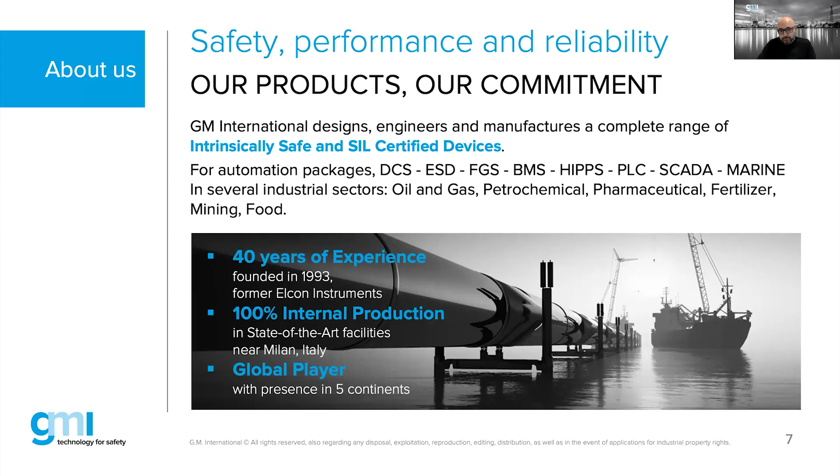As I mentioned before, we are a safety company and we aim to provide safety and reduce the risk of hazardous events, and to safeguard people, assets, infrastructure, production process, and the environment too. So for this reason, the quality aspect of our product cannot be overlooked. We design our products, we manufacture and test them 100% internally, meaning that we do not outsource any of these tasks. This is why we are confident about the quality of our product.

A couple more slides before we get to the webinar. One is about the certificates, it's the next one I suppose. Yeah, this is the product range, but we can go to the product range in a moment. About the certificates, we have... sorry, I was too quick.

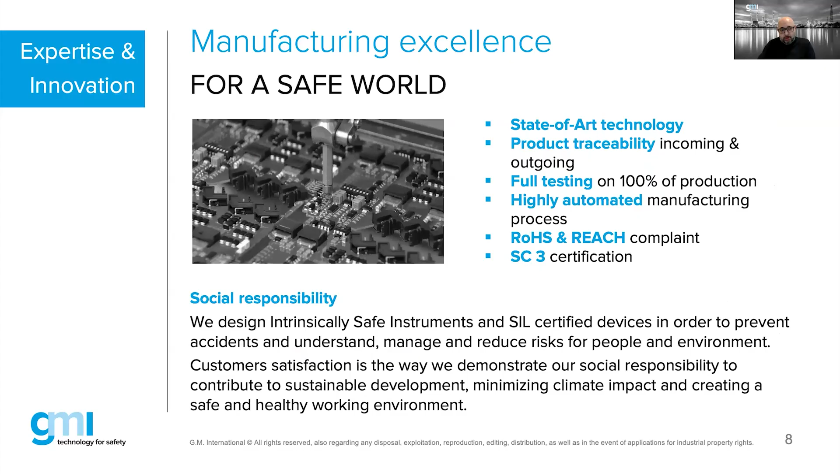About the certificate, or at least the certification bodies that we're dealing with - this guarantees the quality of our devices, but also guarantees that GMI products comply with market requirements according to different local regulations. Now we can go to our portfolio, a quick overview.

Just a minute. So as I was mentioning, we have IS barriers, so intrinsically safe barriers, safety relays, SIL certified with and without line monitoring for both energized-to-safe or de-energized-to-safe applications. We have isolators, we have AC power supplies up to SIL 3, temperature and digital multiplexers for Zone 1 installation. We have custom termination boards for easy connection to main PLC and DCS systems, HART multiplexers, surge arrestors, and the new X1 series.

The new X1 series is the newest line of products, a series of termination boards including IS barriers, isolators, safety relays, gateways, and HART multiplexers too. The final slide is a list with some of our customers - we stretch from system vendors to EPC and OEM and so on.

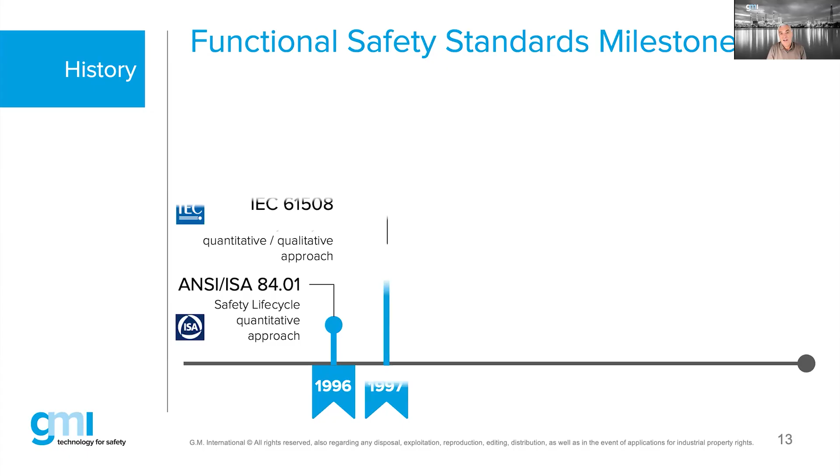Rightly followed in 1997, we had the first edition of the IEC 61508. The IEC 61508 is the life cycle mainly for manufacturers of electrical components, electrical signals inside their subsystems, and/or for programmable electronic safety related systems, which we'll abbreviate as E/E/PES.

So the IEC 61508 came out in '97, and the backbone of this functional safety standard was the safety life cycle. It's based on that life cycle that we have today our 61511 life cycle, which is a similar approach and framework that I'd like to talk to you about.

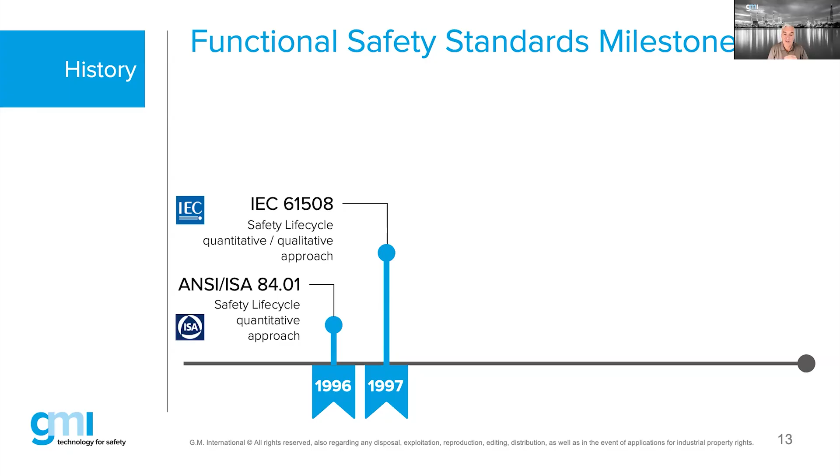In 2004, we had the first edition of the process industry dedicated functional safety standard. This functional safety standard is a kind of good engineering practice on how engineers need to define, integrate, operate, and maintain safety instrumented systems.

So the product range that Gabriele just showed you for GM International fits totally into the picture of the safety instrumentation function loops. When you're building a safety loop, we call that a safety instrumented function. All of that is described in chapter 11, the design and engineering of your safety instrumented system.

You see here a small note, an asterisk between brackets. ISA, which had previously released the 84.01 in 1996, adopted the IEC 61511 in 2004 with one single change. They added an additional clause, at that time called the grandfather clause, and the reference for that is shown here.

Moving on to 2010 — I take you back to April 2010, when the total release came out of edition 2, the revised edition of that manufacturer-dedicated functional safety standard for E/E/PES.

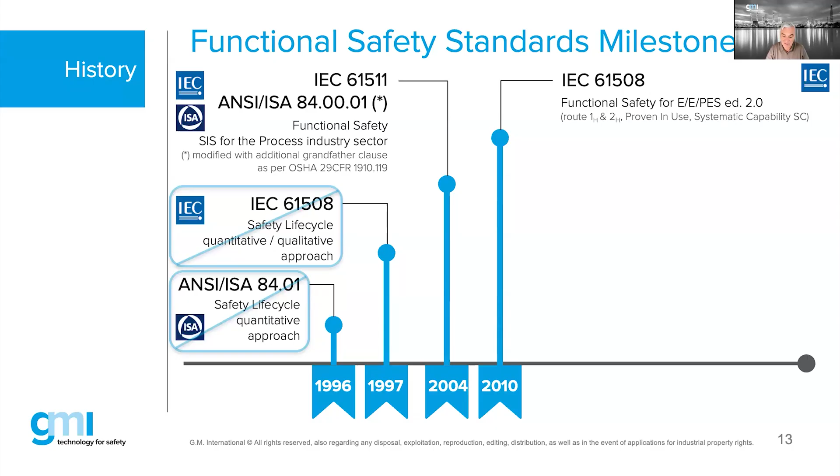In 2016 and 2017, we have two different dates here. Edition 2 was released by the IEC, the International Electrotechnical Commission. So the 61511 has been revised — it was released as edition 1 in 2004, but after 12 to 13 years there was a new edition out, and the new edition is the current edition for today.

When the edition came out initially in 2016, there was a problem because they released an older draft that wasn't supposed to be released. That's why in September 2016 they came up with a corrigendum, and finally there was an amendment out in 2017. What can you take away from this? If you're using the 61511, make sure you're using the 2017 edition and not the 2016, which could potentially be a wrong release.

There we are covering things like route 2H, which is called the prior use, where previously the 61508, the route 2H for the manufacturers, that is called proven in use. And they are both based on quality feedback data from the field that both parties will have to prove. Here, the preference of the 61511 edition 2 today does not want to use necessarily a safe failure fraction, and there are particular reasons for that.

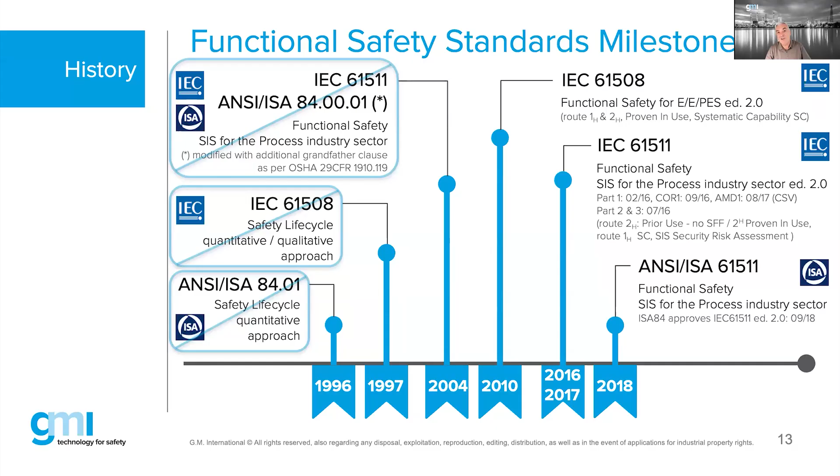But if someone from the US or working on projects for the US would have experience with, they have adopted the ISA 84.00.01, that used to be called 84.00.01, now called the ISA 61511, and they adopted the current edition 2 one-to-one in the year 2018. Of course, they wrote technical report 4 in 2020, which was the application on top of the 61511, but that's a technical report which is not shown here on this slide.

Taking you a little bit into details of the standard itself, there are 3 sections. We call them section 1, section 2, and section 3. And only section 1 is a normative section. Section 2 and 3 we call an informative section. In theory, the informative section here in part 2 should be able to explain you with, let's say, explanation enabled to take away your subjectivity, enabled to make the interpretation from the normative requirements with some guidance text in part 2. That is the theory.

Unfortunately, it's not always so easy as it sounds, because often in part number 1, the normative section, they will command you, you shall do something. Whereas in part 2, the informative section will not necessarily help you explain how you can achieve whatever the requirement was asking you to achieve.

So edition today, edition 2, is the consolidated version 2017, which will actually include the complete framework. And one of the frameworks that we will explain today will be that life cycle. It will also define different systems on how you can configure them with system architectures, with hardware fault tolerance, etc. It will have dedicated requirements for hardware as well as for software.

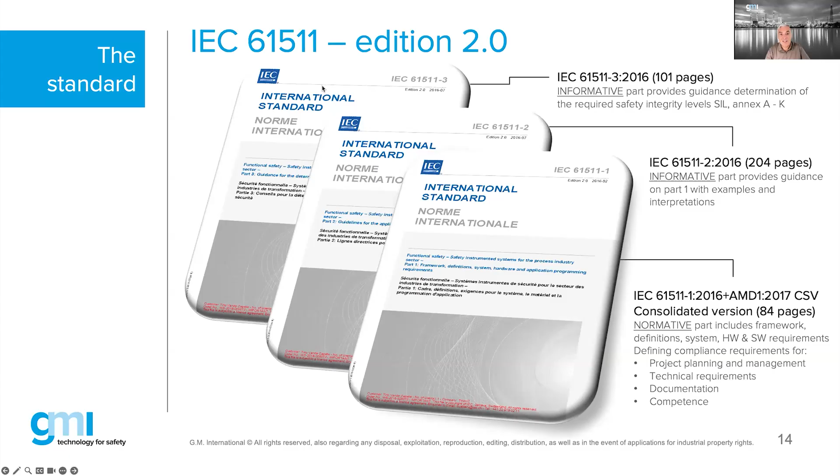Now, it will not give you guidance in part three, as an example, on how to run a HAZOP or how to do a LOPA. They may refer to it, but let's say part three, there's some room for improvement on that informative section, part number three.

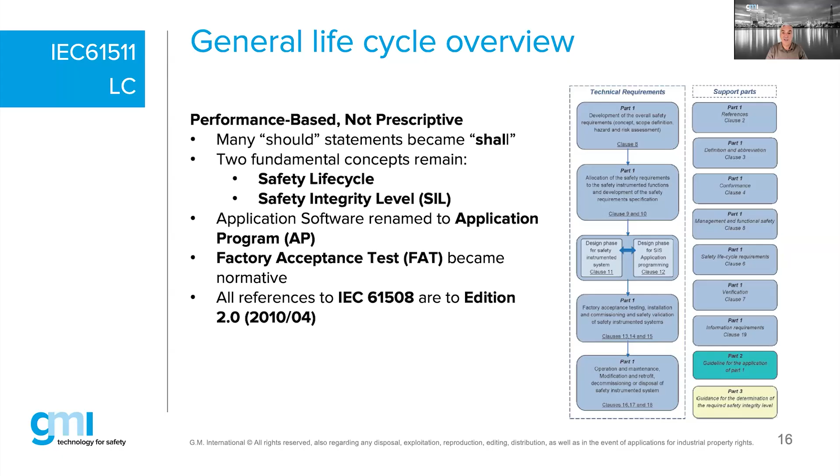There are two fundamental concepts which remain the same comparing it with edition 1. So if anyone listening into this webinar had some experience with edition 1, it's the same approach that we will do in edition number 2. The life cycle is a fundamental approach on how we have to handle all those activities in a systematic way, in the hope that when we can force our engineers to follow that systematic working principle, they will follow step per step, they will document step per step, they will verify step per step.

That's basically the idea behind such a life cycle - forcing engineers to do something in a systematic approach and giving them some guidance will hopefully lead to engineers having less room for making mistakes.

It's a probabilistic performance-based design, therefore the standard is called performance-based, since we are using failure rates to express our availability or unavailability on our safety loops. In safety business, we're always caring about those dangerous failures, which is opposite to production and process people. Those typically focus on maintaining production, whereas safety engineers typically focus on whether we can still achieve safety despite having one or more internal dangerous failures in our safety loops.

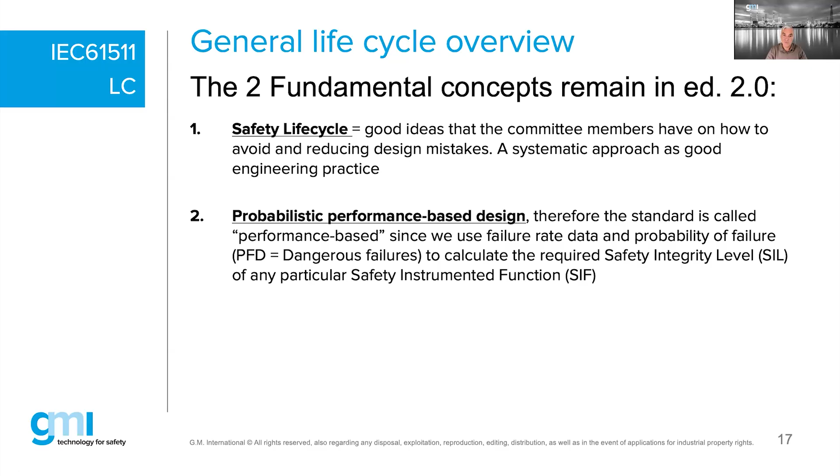Let's see the picture of the life cycle, which the majority of you hopefully have seen already. The life cycle itself starts from the very first task in any project, which is always to identify your hazards. Once we start to understand our hazards, we need to analyze the hazard to understand what are the potential consequences and what are the potential frequencies that this hazard can occur.

Once we understand the consequences, the frequencies are always very difficult to judge - how frequent something will happen if it potentially never happened before. So how do we judge this? There are also items we could highlight, mainly covered in a training course. We are skipping that mainly in a webinar, but briefly, the estimate of frequency is the first challenge in most projects.

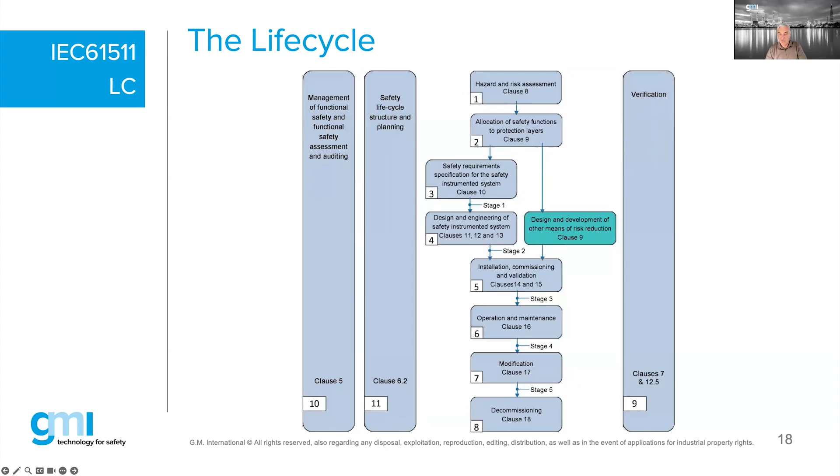All of this must be managed, assessed, audited, nicely planned, documented and structured. And of course every phase, before we continue, needs to be verified. That is the life cycle explained in a record tempo of 10 minutes, on how you have to handle your projects.

Summary: it deals with activities and responsibilities in a systematic way. It needs to identify the competencies required per phase—who can do what, and because of their competence, they are the engineers identified to handle those activities. There need to be documented requirements so we know what we're trying to achieve. It also addresses the life cycle: functional safety management, verification, validation, functional safety assessment, and audits. The last point concerns quality—how we can prove, check and maintain the quality of those activities for which we are responsible and accountable.

And clearly, we will have a different life cycle for an end user versus a system integrator versus an engineering contractor.

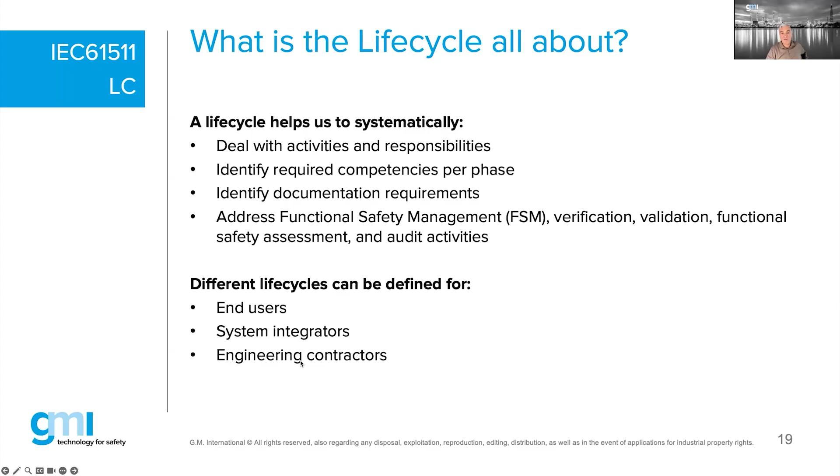I made it fixed, you have it in the meantime? So, all right good, I think you can see it now.

In addition to lifecycle activities, requirements are changing per SIL level - that's the first answer you could think of. B: it is irrelevant of the SIL level, which means it is neutral, the lifecycle is applicable for every SIL. C: it is not applicable for SISs built before 2016. D: none of the above. So what is your gut feeling - A, B, C, or D?

Same as during our exams on the competency review for TÜV Rheinland, only one answer is the most complete and most correct. So if you believe that none of A, B, C is correct, then you have to select D, or you can select either individual A or B or C.

Okay, we have 65% of our participants clicked. In the meantime, 74, 73 - so we're nearly there, we need 2 more clicks. So whoever has not clicked, give us one of your guesses. You cannot lose any face or money or your job, because we will not tell your boss if you clicked the wrong one, because we are very polite here.

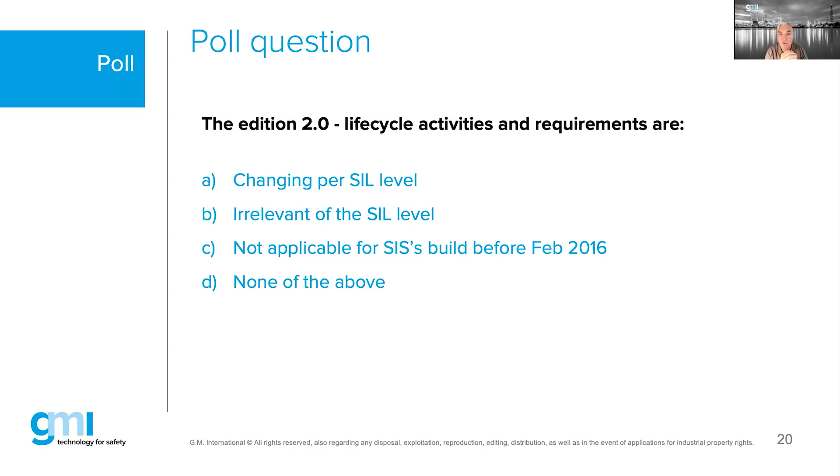So the only correct answer would have been B: it is irrelevant of the SIL level. Even for the older systems, we still have to investigate and still have to do our gap analysis.

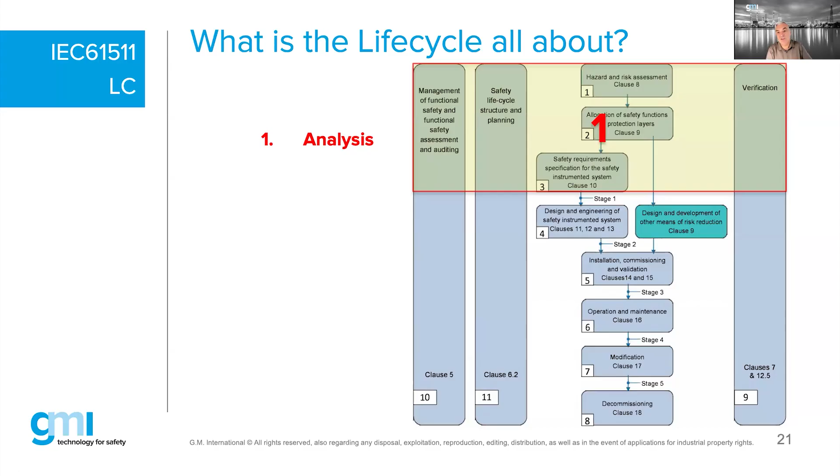In summary, we have the analysis phases - phase 1, 2, and 3, which we call the start of any project. Then we have the realization phases, where we design and engineer our system, install, commission, and prove again with validation that the systems are ready, the people are ready, the procedures are ready, etc. Then finally we have operation and maintenance, which is typically the longest duration of any project.

You can imagine any engineer involved in design and engineering themselves - maybe months, not typically years. But when you go to operation and maintenance, some current existing customers are running those facilities for 50, 60, 70 years. I've even been on a plant that was more than 100 years old - it even survived the world wars and was still there. That means those types of plants exist for many, many years.

That means certainly here we have a very long period and rotation of people. We have people going into retirement, people quitting the job, and shift changes.

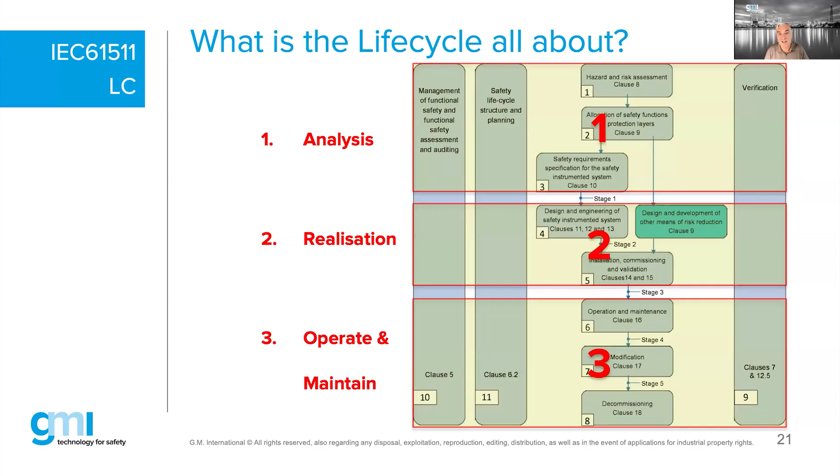So how do we maintain all that culture going with all those different people? Whereas here, if you're doing a HAZOP and you are involved in a HAZOP team, hopefully you will not rotate your people every single meeting. You will have the same consistency of people during that.

So that is the challenge that we see here already in that life cycle period. And of course, everything must be managed, assessed, audited, documented, planned, and also needs to be verified. That's the overall definition that we show you here in bullet number 4.

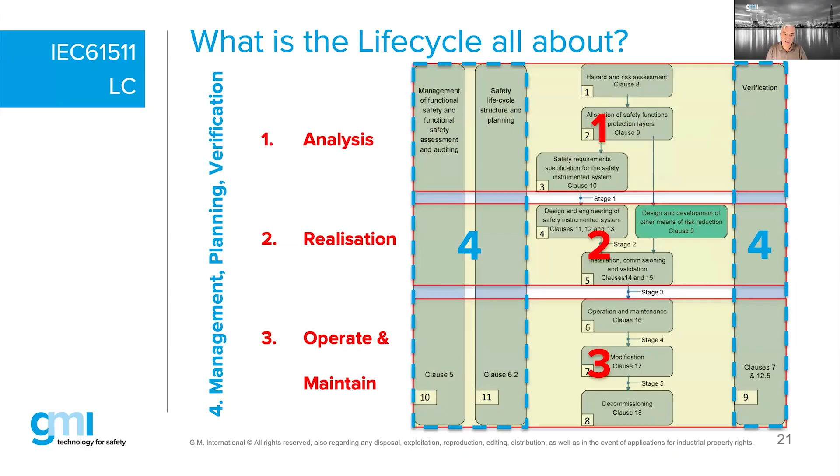I'm going to give you a wrap up on all those phases because I still want to handle your registered questions during your registration. So, what is here the first 3 phases on the analysis, which is phase 1, 2, and 3? It always starts that we are requiring that people will identify the process hazards.

And also you are required, mandatory as a functional safety management requirement, you are mandatorily obliged to define your risk that goes along with your hazard.

For instance, you cannot do like they have done in the old days with the incident in the industry called Bhopal in India. It was based on a US end user that did a cut, copy, paste from an existing facility in the US and planned it into India without doing a new risk analysis, because there they had a completely different risk criteria around that facility. Well, that is certainly not something we would like to repeat in the future.

That means that since edition 1 came out in 2004, it's mandatory required to prove that you have done a hazard identification practice, a hazard analysis, and also a risk analysis.

What is new by edition 2? Well, new - it's already 9 years old today, so it's still called new, but it is based on the latest edition - you shall carry out a security risk assessment on your industrial automation control system, which we call the IACS.

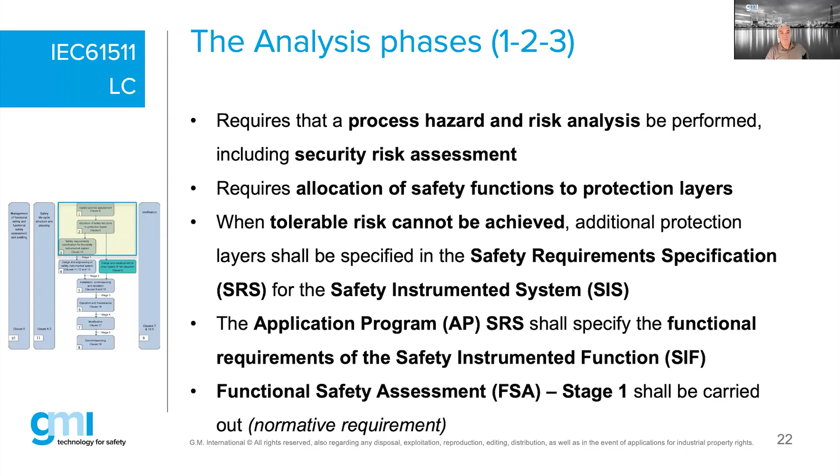The next step was your realization phase, which is 4 and 5. Here we're going to go into our design and engineering, which is the majority of text input in your normative section, part 1 of the 61511.

And if you go into chapter or clause 11, it's called design and engineering of your safety instrumented system. And of course, there is a lot of technical detail in there that you need to understand and be able to build the correct architecture for the dedicated SIL that you try to achieve.

So you will be driven into a certain system architecture, which will be based on either route 1H or route 2H. And route 2H can be here, in this case, either prior use for the 61511 for the end users, or proven in use for the manufacturer, which is the route 2H coming from the 61508. It will specify techniques and quantitative targets for your SIL levels.

You need to go through your factory acceptance test in order to prove that you are checking and testing the functionality of whatever system you have been building, based on your safety requirement specification. And that needs to be followed here in that yellowish block in the middle. You see there a small stage 2.

Stage 2 is again a normative requirement from the IEC 61511 standard that needs to be carried out by the senior independent competent person. They need to make an expert judgment, and that expert judgment is not related to any work activities involved in phase 1, 2, 3, or 4, because you need to be independent from the design and development of other means of risk reduction, that is what this greenish block is showing you.

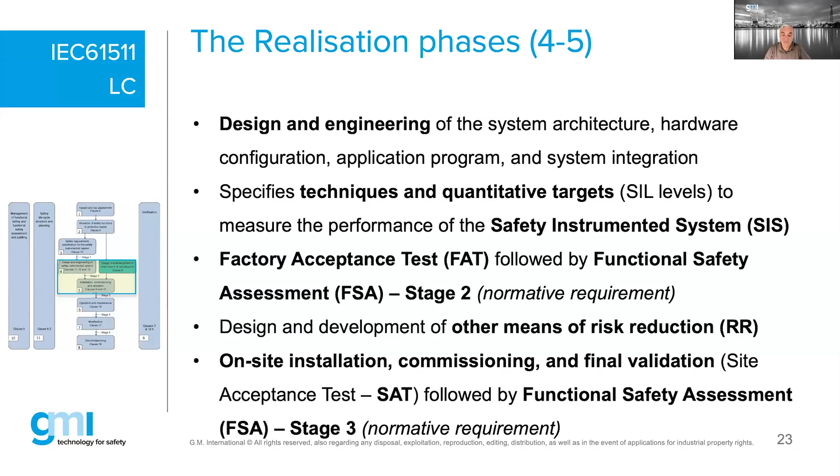And finally, we go to the operation and maintenance phases 6, 7, and 8, which again, that's probably 10, 20, 30, up to maybe 100 years or even more. So it's for a very long period. You try to operate and you try to maintain your systems safely.

The focus of IEC 61511 edition 2 is mainly based on forcing, or advising, the end users to collect field data from their own installation, with their own experience, with their own proof test evidence that they have done, not from a database coming from a collection of data from other fields, other vendors, other generic data. That is not the intention of IEC 61511.

So basically, it's quality field data that we need to try to collect through operation and mechanical integrity programs, enabling us to prove the performance of our safety instrumented systems, if I would be here now as the end user talking. It also requires that you prove your proof test effectiveness and consistency throughout your maintenance phases. In other words, if you have all this rotation of people, all these different people coming in with the same job profile, how can you prove how consistently those different engineers are carrying out the same proof test on your safety systems?

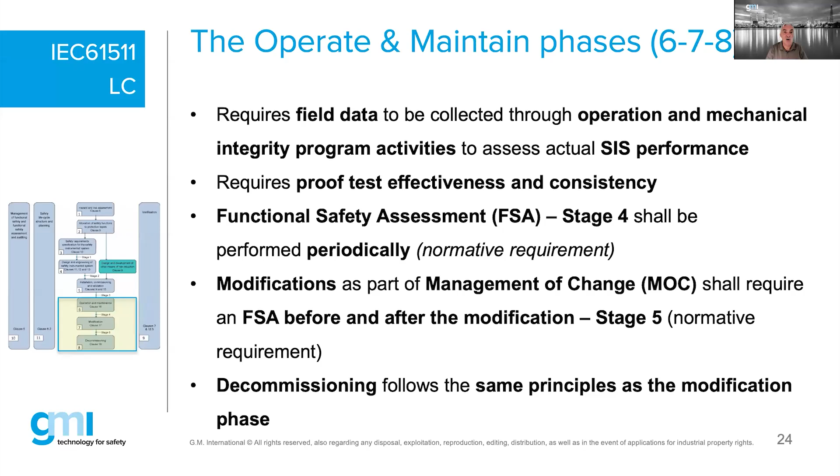Summary: the general phases 9, 10, and 11 are shown here on the left-hand side. 10 is known as our functional safety management requirement in the standard, whereas 11 is known as the structured planning and documentation. And here, block number 9, or phase 9, that is our verification, which is valid for every single phase in the life cycle.

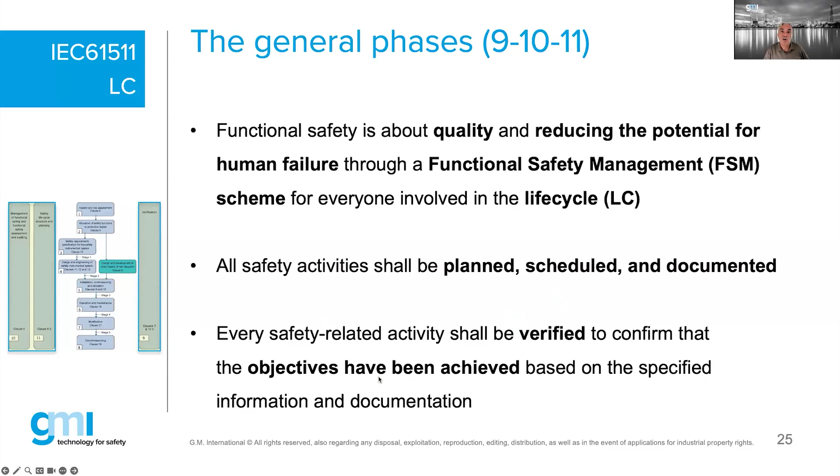So functional safety is about quality and reducing potential human failures carrying out activities in that life cycle. All the safety activities need to be planned. So we need to exactly plan when we will do all those activities in a structured way. When they are planned, they will be referenced in a document, which means the document becomes our requirements. And of course, they will be planned in terms of activity planning—when will we carry out what phase in the life cycle? Every safety related activity shall be verified before we move on to the next phase. That is basically the backbone of a life cycle, here called IEC 61511.

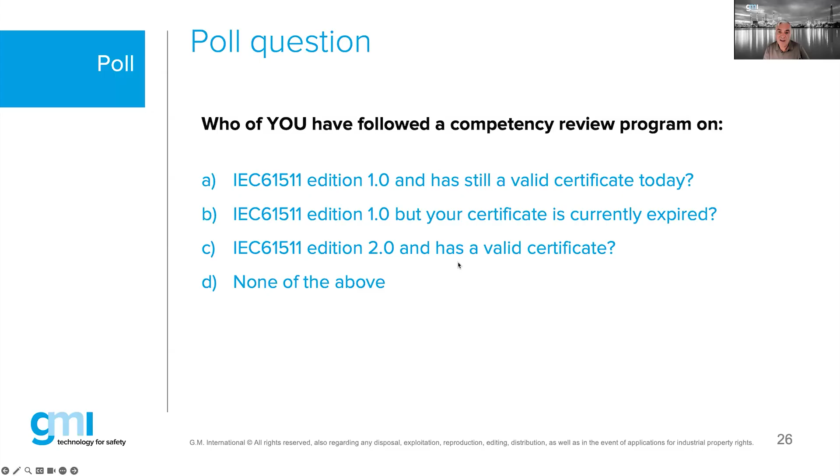So some of them have an expired certificate, and that is for us an indicator to see that you're unable to prove to the outside world, to your management, or whatever, that you still have a valid certificate, or you need to prove that with the current edition you are still competent. There are, of course, some competency review schemes available on the market.

What is my summary, my main takeaway I want to give you? It's not all about that famous SIL number and PFD, because that's often what we've seen in the past. People think they are doing safety engineering, and they're blindly focusing on that SIL number and those PFD numbers. Of course, PFD numbers are purely an estimate of availability, and that's certainly not the purpose of the 61511. The main purpose still today for me is giving guidance to engineers, enabling them to carry out the activities. And in the hope that when they follow that type of guidance, which is called good engineering practice from the 61511, they will make fewer mistakes themselves. They will learn, hopefully, from mistakes that were made before, and that lesson has been given as guidance in a text called the IEC 61511.

So the Functional Safety Lifecycle provides you a systematic approach enabling you to achieve, hopefully, safety in the process industry. And the process industry, by edition 2, the following applications are covered: oil and gas, traditionally from edition 1, also chemical and petrochemical industry like edition 1 was covering. What was new by edition 2 in 2016-17, they added the pharmaceutical business, or applications, and also food and beverage.

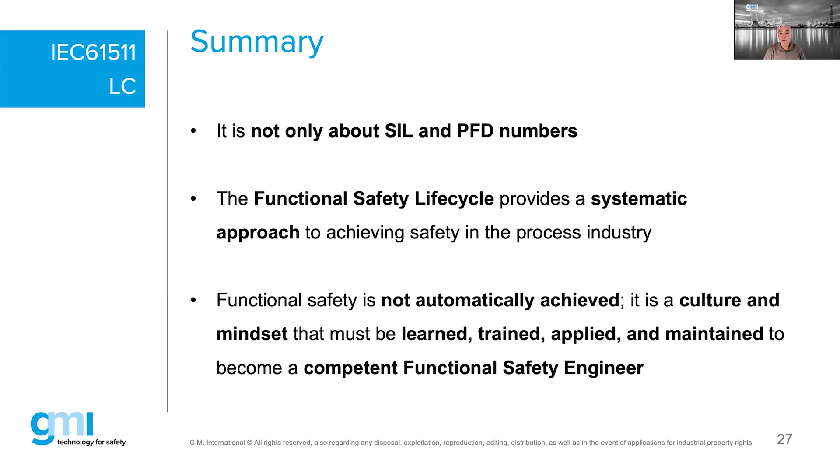Functional safety is not automatically achieved. It's not like, oh, I bought a SIL3 relay and therefore I don't have to do anything, everything is safe. That's not how it works. You're building integrity in your system, but you still have to do something. You still have to prove that things are working the way they are supposed to work. It's more a culture that sits between your two ears, so you cannot buy it. You only have to earn it by trying to practice it, by trying to understand it, by trying to perform it. So it's a mindset that needs to be learned and trained. It needs to be applied in your daily activities, and of course it will need to be maintained with evidence. You need to prove how you will maintain that, in order to become a competent functional safety engineer.

We at GMI, with a team of engineers, are helping support the life cycle for our end users or engineering teams doing those types of activities, which I will not list here. We can also additionally support you with life cycle support for IEC 62443.

One of my main tasks on the team is still providing the functional safety engineer training, and we just finished last week our last training for 2025. It's been an extremely busy year, so many training courses and so many engineers trained again this year that I ask myself if this will continue for the rest of my activity as a trainer for TUV Rheinland. We mainly train engineers on the SIS competency review program from Rheinland.

We also have two cybersecurity courses. There's a third one not shown here, which is the combined fundamental and security risk assessment. We also, of course, do customized in-house training. I have one at the beginning of next year in Eastern Europe, customized based on the client's request, tailored toward whatever experience that specific company wants to have.

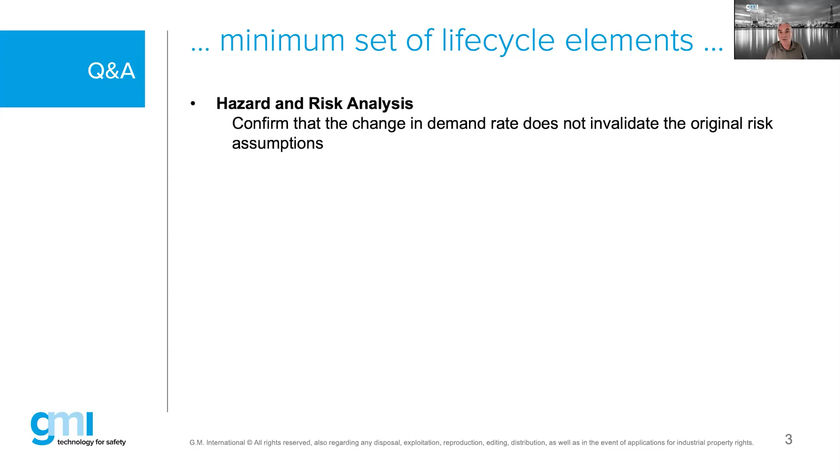Remember, in the original risk assumptions on that project, the team brainstormed and estimated a specific demand rate for that hazard, which came to a number, and based on that number someone built a safety system. If we now find the hazard demand is increasing, that means the original assumption may have been wrong. So what do we have to do? That's the first step. Second, based on the new demand rate and the required risk reduction, we may need to think about whether we have a different mode of operation.

I'll give you an example. Potentially in the initial phase of the project, the brainstorming specialist team was thinking that a demand on the hazard on the process will not happen more than once every 3 years. By evidence now, the demand rate is every 8 months, meaning the demand is happening more than once per year.

That means you're moving from a low demand mode to a high demand mode, and we want to investigate why we have more demands. Maybe we are not handling the product as the brainstorming specialist team was thinking, maybe we are handling with less caution. Maybe that's the reason why we have more frequent demands. That is one potential reason.

A second reason could be that the material you're using in that safety loop is maybe not as reliable or trustable as the brainstorming specialist team was believing when they assumed it would protect against the hazard.

We also have to look at the proof test interval assumptions, because initially there was an assumption about how frequently we would go and test that specific system. We certainly will have to re-estimate or re-verify the safety integrity level of that safety function, based on the updated demand frequency of that loop and the required proof test interval, to check if our mission time can still be achieved for that specific safety loop.

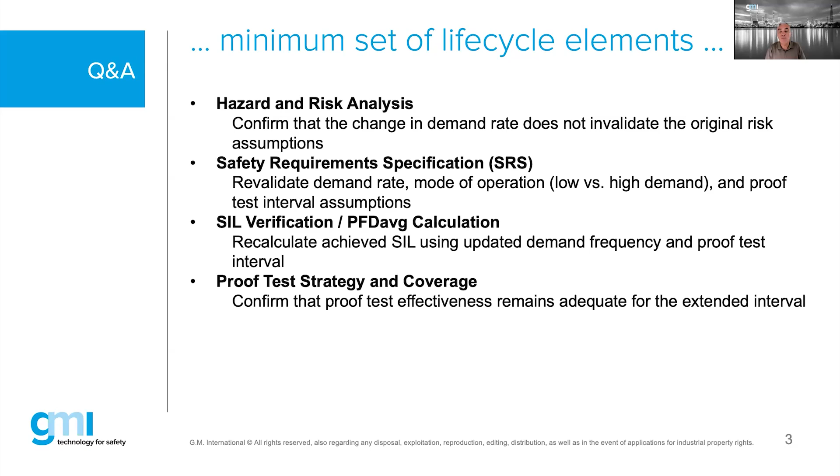The proof test strategy and coverage factor need to be confirmed again to check how effective the proof test was previously on those loops. Because maybe the proof test previously was not so effective, not good enough, and that was one of the reasons why we now have more frequent demand on that specific safety loop. It was probably not the hazard demand, it was a demand happening because of some mistake or hidden failure still present in that safety loop.

Operation and maintenance procedures need to be continually verified again to check the capability: do we have enough information for our maintenance and operators to manage and reveal those dangerous failures in their system? And of course, all of this needs to be reassessed by an expert judgment, someone not involved in the same operation and maintenance of that same SIS system.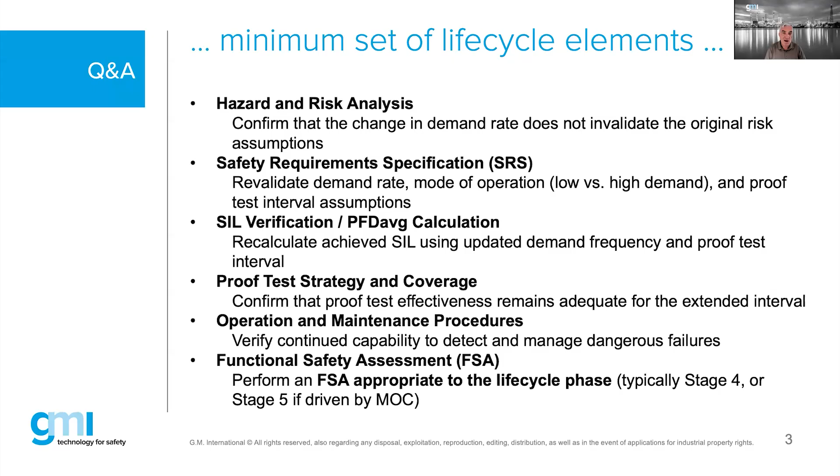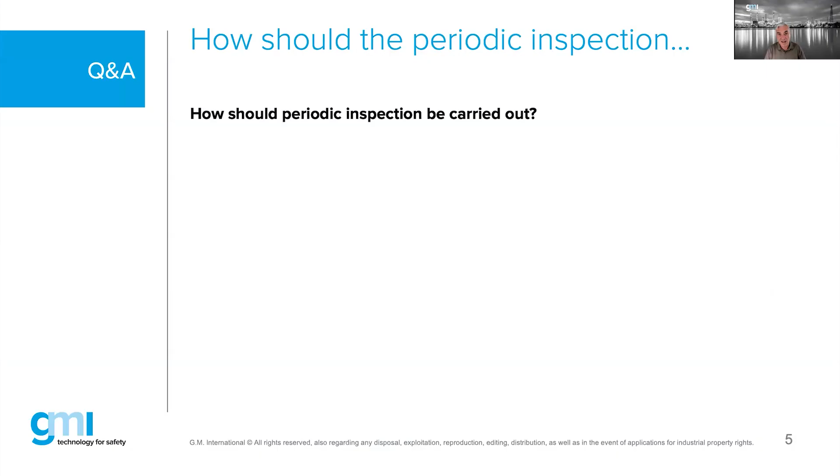Second question: how should the periodic inspection be carried out, and what are the requirements for competency of inspection personnel? That fits perfectly in the life cycle discussion. Simply speaking, follow your procedures.

Of course, if your procedures are not detailed, complete, or clear enough, the engineers will not be able to follow the right procedures to handle those periodic inspections, based on defined inspection intervals. Very clearly, if someone defines at the beginning of the project that we will test the loop every 1 year, we need to check that this 1-year interval is maintained and followed. We do not want to delay this by whatever excuse. We need to check that whatever was predefined as an inspection proof test interval has actually been followed.

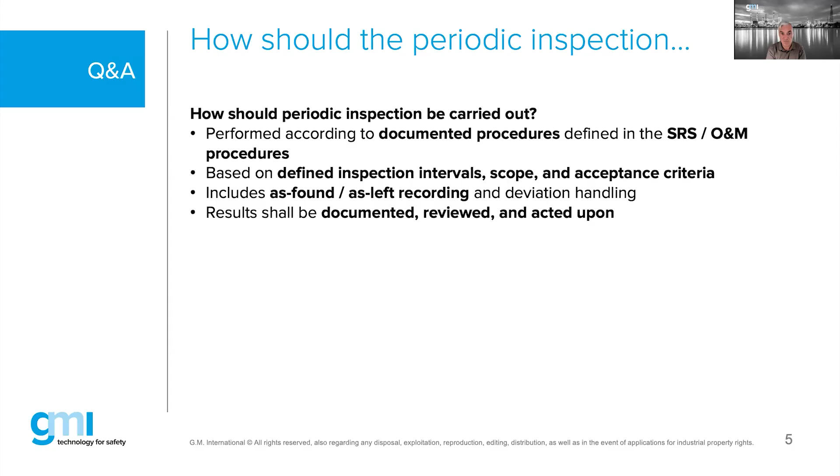So what are the acceptance criteria? Include as-found, as-left, plus the recording and evidence. It's always the evidence that we need to check during that periodic inspection, and the results shall be documented, reviewed, and acted upon. That is the evidence we need to see in your kind of verification report, which is also part of the evidence for the quality measurements of the functional safety management under the SIS performance.

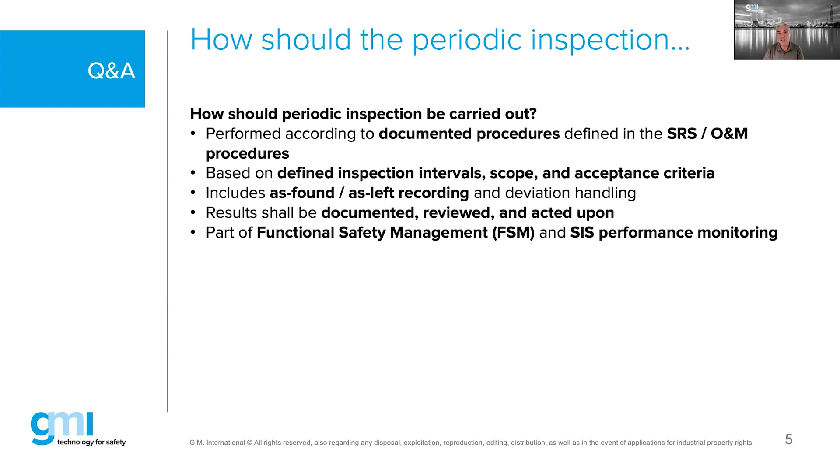And also for the inspection methods, we need to help enable how they can inspect those specific functionalities on those loops. Competency shall be demonstratable and shall also be maintained.

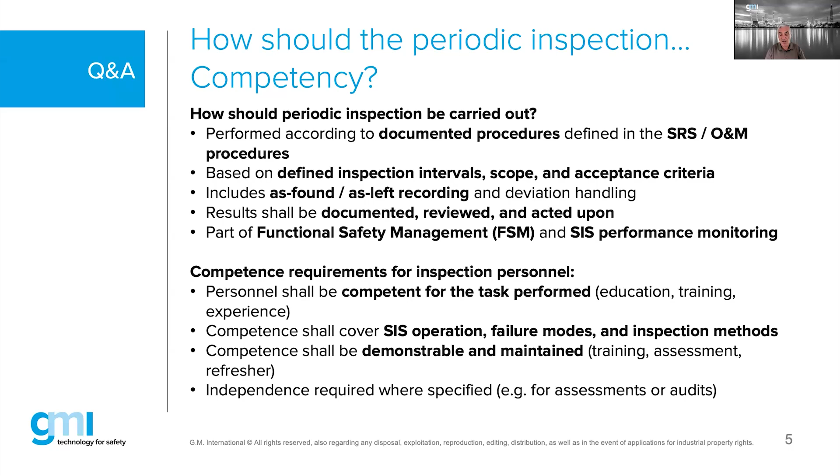You need to prove how you check the competency of those engineers, whether it's operation or maintenance engineers. And of course, the independency required where specified, for example, independency for those expert judgments on assessments and on audits.

The last question I was also given during the registration was to learn more about how to use the life cycle phases in a systematic way. Well, that is actually repeating what we've just shown you in the life cycle. Follow the defined life cycle sequence from top to bottom, so don't cherry pick which one you like to do today.

You need to always go through the complete life cycle and be able to follow it in a structured way. Clearly define the roles, responsibilities, and deliverables. Very important, deliverables per life cycle phase. How can we prove evidence that we delivered the activity as required? Because that deliverable, most likely your verification report, will be needed by the expert judgment, independent expert, senior expert assessors.

Use the safety requirement specification, or SRS, as the central reference across all the phases. So once your projects are built, maintain a very up-to-date, as-built, clear, and complete safety requirement specification document. Apply verification at every single phase. Perform the functional safety assessment as required by the standard, and manage changes through a good MOC, Management of Change Procedure, as is a culture in the process safety industry.

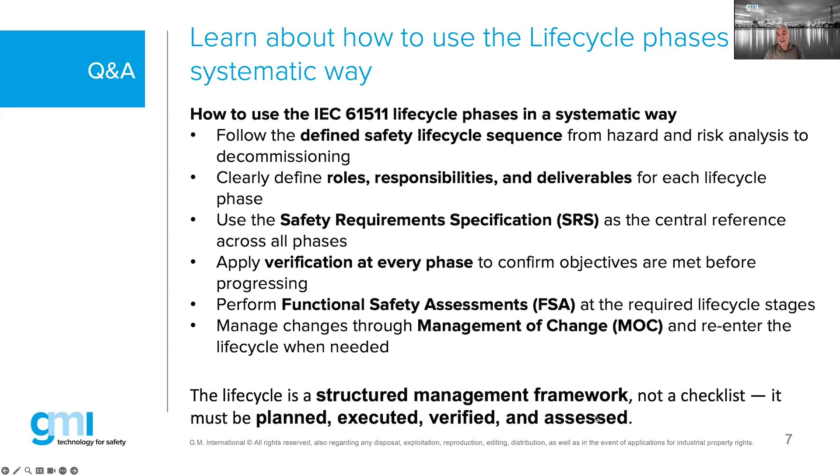There are some more webinars coming. Of course, we are at the end of 2025. 2026 dates were not announced yesterday evening, although Gabriele and myself already agreed on like 6 or 7 dates for functional safety next year to make some webinars again.